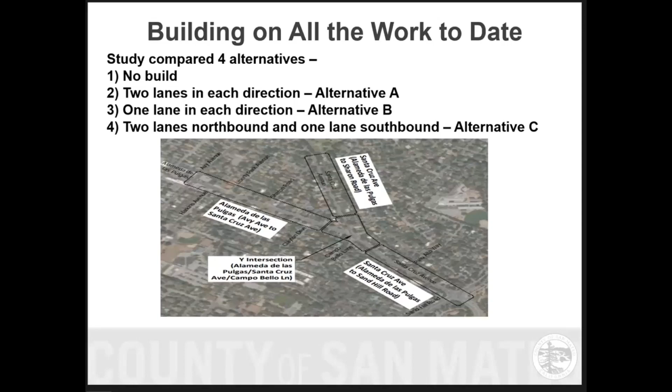As far as what the task force and the study recommended, we looked at the section of Santa Cruz between Sharon and the Y, and no improvements were recommended for this segment because of the limited right-of-way. It's not nearly as wide as the other segments, and the improvements the community chose just wouldn't be able to fit, so that was not included in the project.

Alternative C was selected for the Y intersection, which would be 2 lanes in the northbound direction, 1 going to Santa Cruz and 1 going to Alameda, and then 1 lane southbound. Also as part of that configuration, there would be a no right turn on red at the signal.

North is going this way, south is this way. It's a little unique because the Y, we call this North Santa Cruz, even though it's technically west, and then this is North Alameda.

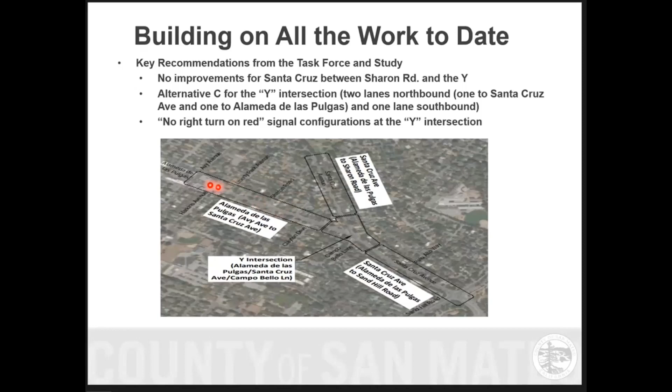As far as the Santa Cruz between Sand Hill and the Y, alternative C was selected for that as well, so that was 2 lanes northbound and 1 lane southbound.

For the segment between Avy Avenue and the Y on Alameda, a road diet was selected. If you're familiar with a road diet, it's basically a process where the number of lanes are reduced in order to gain extra width to provide other improvements like widening sidewalks, installing bike lanes, buffers, things like that. This is done in different ways: you can either make the travel lanes narrower or eliminate travel lanes. In our case, we did a combination of both.

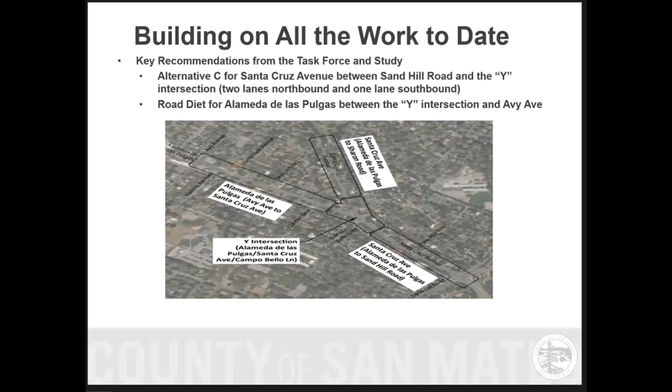As Supervisor Mueller stated earlier, all of these were recommended by the task force as the preferred alternative. After the study was completed and approved by our Board of Supervisors, it was brought onto the design section for us to take the preferred alternative into something that is buildable.

We worked to obtain grant funding for the design, and in late 2020, the county was awarded $700,000 from the San Mateo Transportation Authority to develop the project specifications and design work. The funding was contingent on the approved alternative, as discussed earlier.

In August of 2021, we started the design for the plan, specifications, and estimate. In 2023, the county was awarded a second grant through the Caltrans Regional Active Transportation Program, or ATP Cycle 6, for the construction funding. The Caltrans grant included a total of $5.435 million, so it was a pretty big chunk of money. Right now we're on track to finalize the design by the end of this year.

And so with that, I will turn it over to John Pulliam from Kimley Horn to go over the details of the design.

Good evening, I'm John. Akash and I came on board on this project. This concept had been selected and we were brought on board to take this concept and turn it into design plans and construction contract documents so the project can go out for bid and ultimately for construction.

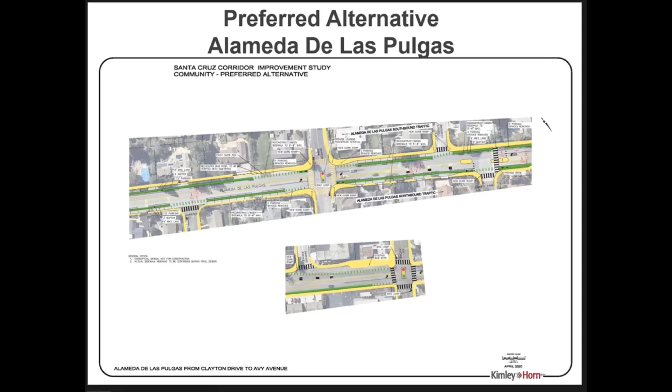We also are incorporating raised islands and raised medians at different locations. We're using some medians and islands in the street to help provide refuge areas for pedestrians as they're crossing. These also just help to slow traffic.

Another part of this is that as we go from a lane diet from 4 to 2 lanes, it's going to be a slower street. We've got 1 lane in each direction, and we'll have some channelization taking place with these raised medians. As you drive on the street, it's going to give you the feeling that the road's a little bit narrower, not as comfortable to drive fast on. That's a big part of what's happening here, that narrowing of the feeling as a driver that this is not a street meant to drive 40 miles an hour on, but a street you're comfortable driving 25 miles an hour. That's done through a variety of factors, including a single lane in each direction and the channelization through these raised medians.

This lane diet also gives us room to put on-street buffered bike lanes, which are being incorporated along the corridor. Along most of those bike lanes we'll also have a stripe buffer next to it, so as a cyclist you're not going to be right next to traffic. You'll have an area that's striped out that provides additional space between you and the vehicle you're riding your bike next to.

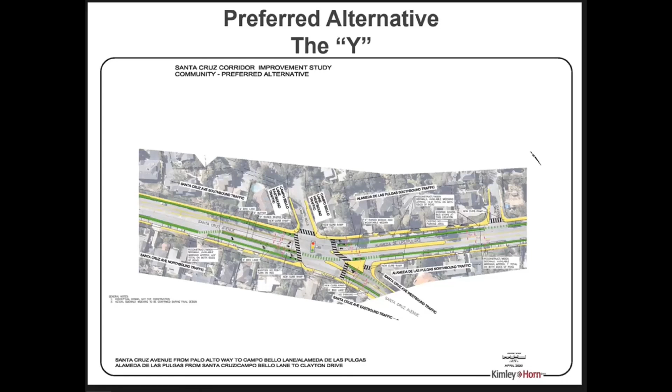So let's click over from here and go to the design plan as it is. Let's just go one more to the design. Hopefully you can make out what's going on here.

Okay. Sorry about that.

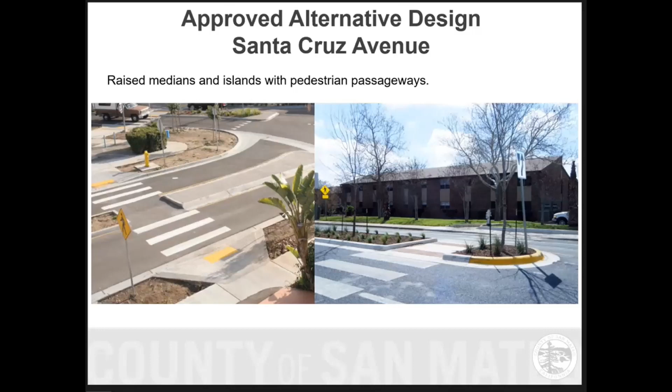This next picture, I just wanted to clarify the type of treatment we're talking about - a very standard type of cut-through that you would see at roundabouts or at locations where a crosswalk is moving through a median. These are based off a Caltrans standard design that we use all across California.

We did want to go back and highlight that we stayed very close to the preferred alternative. There were very few changes that we had to make - some tweaks as far as how the lanes were laid out, but I just wanted to walk you through the few things that we did have to change.

We'll be working with individual property owners as we identify potential retaining walls. One reason this is an issue is that as we install the sidewalk, we typically install it from the back of walk, so generally construction would start here. We want to make sure there are no issues to the private retaining walls. We're going to try to protect these in place as much as feasible, and we'll work with individual property owners as we identify potential issues.

Another thing we've identified: as you widen sidewalks, you cut into the roadway. Generally the roadway is crowned, meaning it's high at the center and slopes down to either side, which helps with drainage. As you extend sidewalks into the roadway, they end up significantly lower than the roadway, and this becomes an issue with cross slopes and driveway slopes. We've identified the locations where we think this will have the biggest impact, and we'll be notifying those property owners and working to mitigate so the proposed slope is as consistent with the current slope as possible.

We always take the opportunity during a project to address drainage and ponding issues. You can see from this photo that there are areas in the corridor where there's some ponding after storms. We've identified those areas, and we're going to make sure that when we do the grading, we try to eliminate these ponding areas as much as possible. A majority of the time it ends up being in the bike lane, so we want to make sure we address any ponding issues so that bicyclists aren't affected.

As John spoke to earlier, parking spaces are going to be lost, and we have identified four additional parking spaces that will be affected by the project. We're still looking.

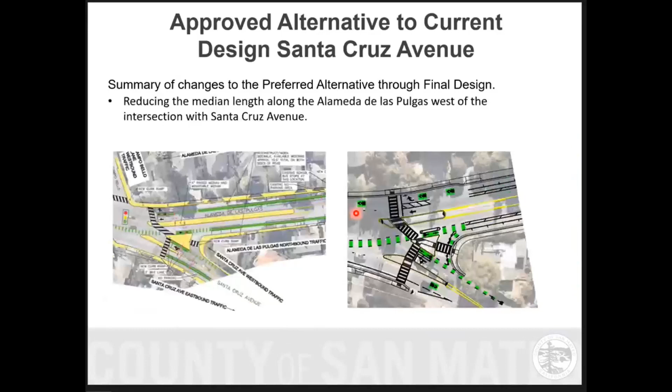Let's see, let's move on. Well, I just want to say that some of us in this area are elderly. I may not look elderly, but I'm in that elderly category. I just spent a month at home, shut away while I was recovering from surgery. And in a month's time, you get back in your car, and there's the change. You're not having to listen to a board meeting or read your statement.

All right, thank you. So in terms of lighting, lighting is not included as part of the project. I believe this is part of the Menlo Park Highway lighting district. We have a process for requesting lights along the corridor that we can provide to you, but what we can do is make sure our specs include the contractor providing changeable message signs when there's going to be striping or lane reconfiguration a couple weeks ahead, so people are aware there's going to be a change. Generally, once we're done with the roadway work, we have the contractor go out and do temporary striping as soon as possible to avoid this. Noted, we'll try to include it in our specifications.

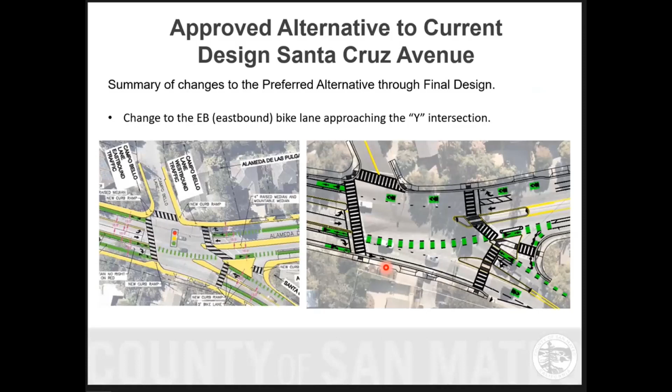So next question - can you please display the slide with Santa Cruz south of the Y? For my question, I have concerns about that bike lane. I'd like to see the one that shows the approach. So if I understand, for the bicycles moving to the left on this, supposedly northbound, there's a barrier in the middle of that. Is it correct that barrier is to protect the bike lane? There's a small barrier, a small raised median right through here.

Okay, so I had a comment, and I hope it's received well. I'm a cyclist, I live just going north on Santa Cruz past the levee. That approach getting into the bike lane is far too short for the cyclist to move over to that left side - this right here, yeah, that's far too short. For me, and I think a lot of cyclists would say the same thing, I wouldn't want to be caught dead, literally, between cars traveling nominally 25 but maybe 45, and that barrier. It's a nightmare for me if I have a barrier here and cars going here.

So please, I think the neighbors aren't very happy about that barrier, some of them, because it impacts their access. If the barrier is there only to help the cyclists, and the cyclists mostly aren't going to want to be in that spot, I think a preferred opportunity is to put sharrows in that left lane the whole way and let the bikes and cars work together to figure out how they're going to go.

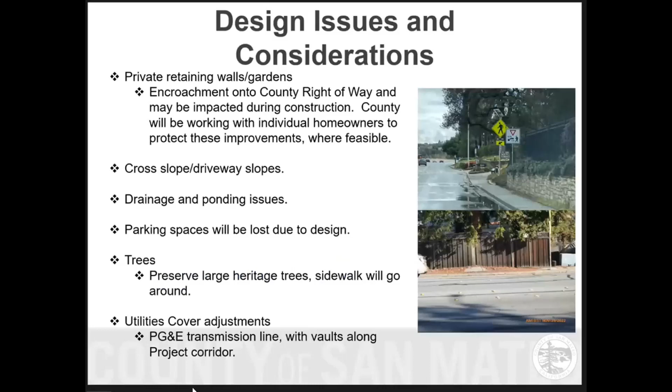As far as cyclists moving in to make a left there on Sand Hill, right now there's not a bike lane proposed or a bike box in that area. If that's a major movement for cyclists and something of interest, that's certainly something we could continue to look at. That is a very difficult movement to make across traffic as folks are approaching that intersection, so I tend not to be a big fan of those types of bike facilities. However, some of us who cycle more often would be comfortable doing that ourselves. So if that's of interest, we can look at incorporating something there for cyclists comfortable making that left turn with the left turning movements.

Describe what happens to the lane southbound from Campo Bello to Sand Hill. I think it's this right here, that's Campo Bello. Are we talking about these lanes approaching? From the Y to Sand Hill, that movement goes to one lane. This is one lane. On Santa Cruz it's going to one lane as well. Correct, it's one lane to one lane.

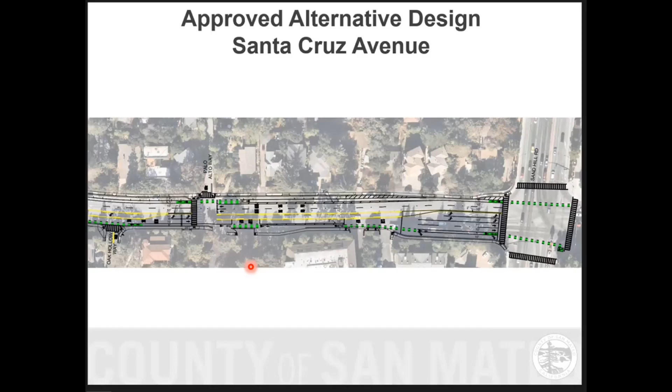So I think generally there's a lot of issues. In 2020, when this went to the Board of Supervisors, Department of Public Works, Jim Porter identified that the Y intersection would be much narrower, that the crosswalks would be much shorter. And yet what we have here, crosswalks are even longer - it just doesn't make sense. Those crosswalks are about 9 lanes long on Alameda there, and it doesn't make sense that you have 9 lanes to cross a 2-lane road. So those are some of the things we were hoping to get done. The crosswalks just generally follow the guidelines of the county - what was it called?

It was a county infrastructure plan for transportation. The crosswalks should be shorter. They should be well lighted. They need to be safer and follow the guidelines given by Federal Highway, NACTO, and others.

Speed is an issue, so we're always wanting to make sure the speed is slower. That can be done through some of the design aspects. For instance, we don't need a 50-mile-an-hour turn at the Y. If that turn were 25 miles an hour, appropriate to the speed limit, it would be more appropriate.

Safety for cyclists, I think we're jeopardizing that. All through the corridor we should have buffered bike lanes, and there's room for that. Yet some of this design is getting it narrowed down to 5 feet with no buffer, while sometimes the bike lane is 9 feet or 8 feet. We also wanted the traffic lanes to all be 10 feet, but there are situations here where they're 11.5 feet, and that was the center turn lane by the Y.

So anyway, we want to make sure the cyclists are safe here. For example, if you look at your merge zone just above Palo Alto Way before those medians, that's going to be the most chaotic point in Santa Cruz. And you're asking bicyclists to join into that chaos, where if you just look, you could move that merge lane all the way down toward the Y, where they only have to deal with one lane of traffic instead of all that merge activity. It's just an example.

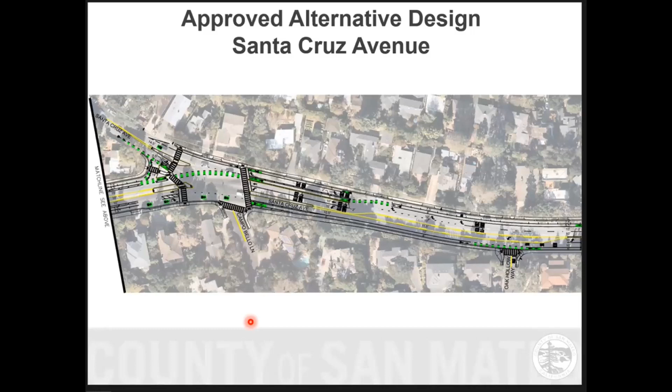Technically it'd be striping, but I can't even give you any details of it yet. It's something that would need to be worked out.

The one thing I do want to share with you all, and I do see your hands, but before I answer and before people start to leave—here in District 3, the district I represent, has been incredibly impacted since December 30th by multiple storms. Literally, I have areas in my district where the roads have been wiped away. Our Department of Public Works has been out constantly since December 30th, working around the clock. And despite all of that, I was in a meeting on the coast last week where there are people who don't have a road, and Public Works was there, Christoph was there, Ann was there trying to figure out how to help people.

So I wanted to share with you all, I know that there is, as with any road project, frustration as you do the implementation. But these people really care about your opinions. They really do—so if we can give them a round of applause. Thank you.